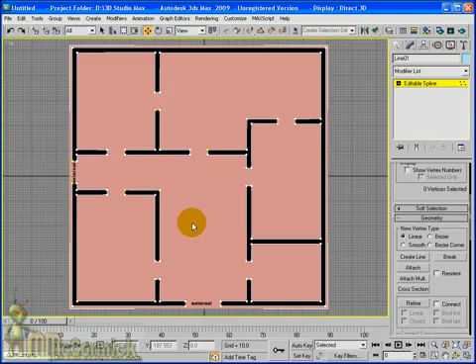Right, I've now aligned all of the vertex points to the walls as much as I'm going to for this tutorial. So you can see from the white points, if I zoom in again, they're all roughly in line with the walls. It's exactly what we want. So if I come right out and show you.

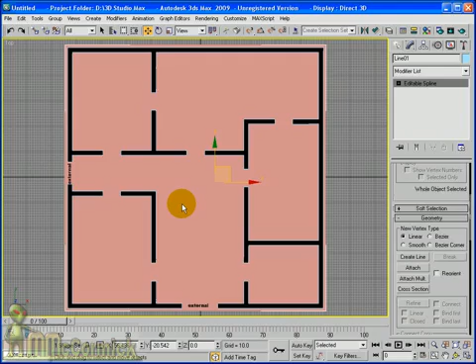Now what we're going to do is take this layout and extrude it up in height. So I'm going to unselect the editable spline. It's a good idea to have this on the perspective viewpoint, so views, perspective, and zoom out a bit, because then you get a good idea about how high the wall is going to be.

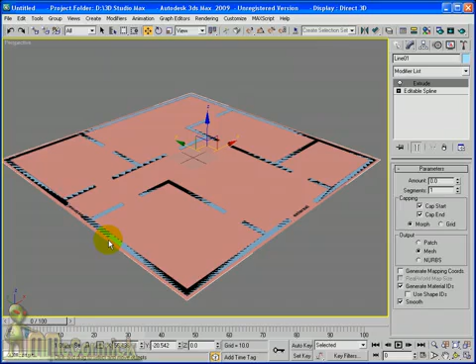So in the modify list, if we select extrude, there we go, you can see that our lines for the layouts have now become polygons, and just by increasing the amount we can decide how high we want these walls to be. Now I'm going to set it about 160 roughly. You can set yours exactly how high you need it.

I'm going to turn on the edged faces. The reason I turn on the edged faces is because I've got an extra step to add some polygons to make the tops of the door frames. And if I increase the segments, you can see we now have a white line down the middle of the walls.

Now I'm going to take these, raise them up nearer the top of the door frames, and that will allow me to join across the top of the door frames to make these bits where the doors are going to go.

So I'm going to add an edit poly modifier and change the viewport to front, zoom out a bit, and we're going to take all of these vertices in the middle and move them all straight up near the top. That's the perspective view, and we can see what we've done there.

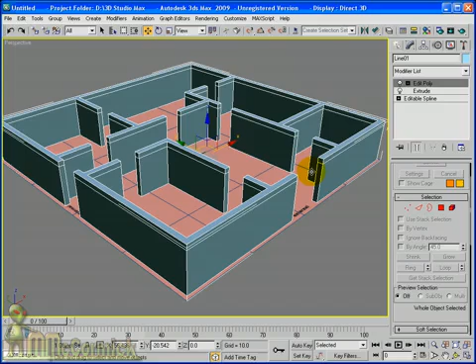So you can see now we have these points that we can use to join across the tops of the doors. So by selecting the polygon, if I zoom in and select that polygon there and that polygon there, you can see I now have both of them selected. And what we're going to do is join this polygon here to that polygon there.

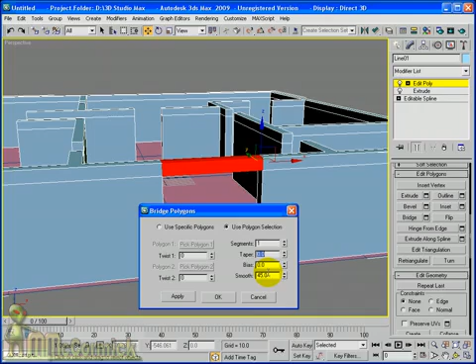We'll use Max's bridge tool. So if I click on the bridge settings, you can see it's automatically created it using the default settings, which is use polygon selection, one segment, no taper, no bias, and smooth 45 degrees. All of that's done, so OK that, deselect it.

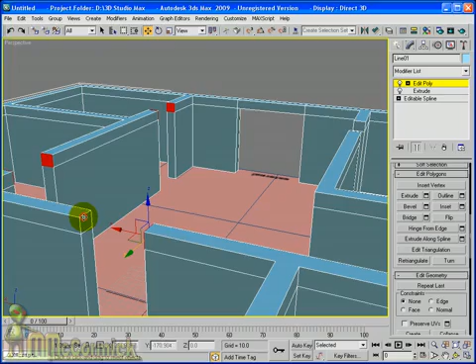There we now have a nice top of a door. You can do multiple door tops at once - I'll show you now. I'm just going to hold down Control, clicking on all of the door tops. If you miss any, it doesn't matter, you can just come back and select them later.

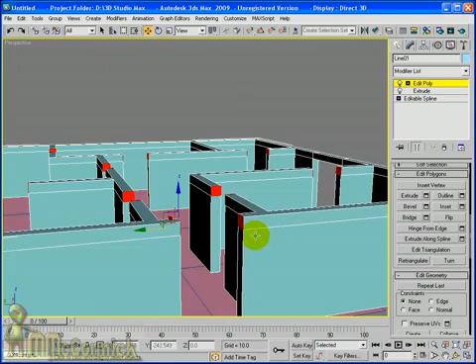Now I think that's pretty much the last one there. And click on the bridge button, and there you go - we now have tops for all our doors. So one quick scout around, make sure I've not missed any. Nope, lovely.

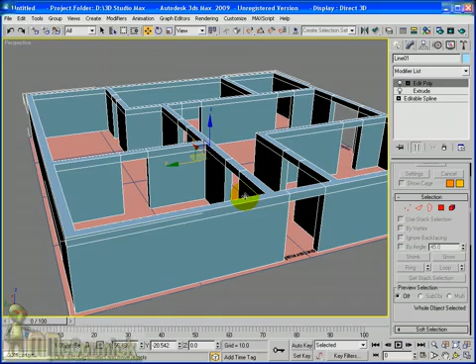Right, so deselect polygon. You can see now that we're almost there. The thing that's missing, unless it's underground, is windows. So if you're going to want windows in your scene, you're going to need to do it. There's a number of ways you can do it. I'm going to do it quickly, using the Boolean.

The problem with using the Boolean is it can create long polygons, and especially for games, anything like that, you might find this can be an issue. In that case you'd probably want to increase the amount of vertices you have in a line along long walls such as this one here. But for this quick tutorial we won't worry about long polygons for now.

We'll just have a go at popping the windows in. In the create panel, under geometry, we're going to create a box. I want to build it on this wall, so I'm going to use the auto grid and build it directly on this wall. I'm going to have two windows on this wall, and I'll click and start there. You can see the auto grid in action, making the box directly on the wall.

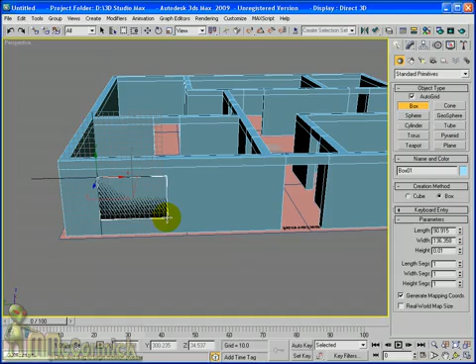I'm going to have that sticking out quite a large amount, and I'm going to move this box to there. Now I'm going to make all of the boxes where I want the windows to be, so I'll create another one by cloning, and this will be a copy. To clone, I held down the shift key and just moved the box.

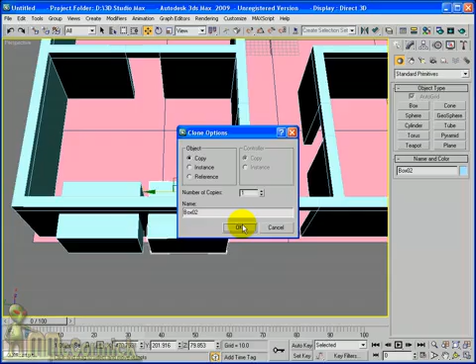Now, so I have two boxes that I'm going to use as windows. I just want to move this box slightly over a little bit. Now, I'm going to create a boolean.

So if I select my wall object, and where's standard primitives, compound objects, we'll go for pro boolean. The pro boolean will take the walls, and it will use these boxes to cut holes in the actual walls ready for the windows. We'll use this by clicking on the start picking button and just clicking on the boxes. There you go, 2 windows all ready.

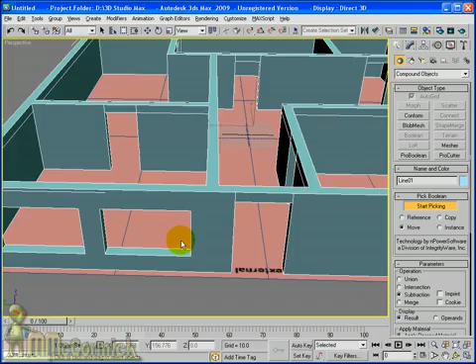Click on the start picking option again, because I don't want to continue picking until I've made some more boxes. So back to standard primitives, let's create some long and thin windows here.

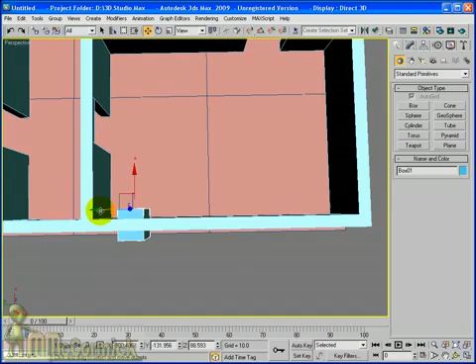Just making sure it's intersecting right through the wall. I think we'll have a row of windows there. That one's come out a little bit close, so control click on all of them and just drag it over so they're more in the middle of the wall. There we go.

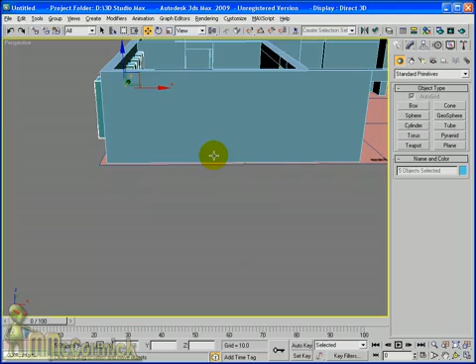What I'll do is I'll take one of these ones, I'll clone that one, rotate it around, I'll use the angle snap and rotate it 90 degrees. There we go. Let's pop this through this wall here and we'll just have 3 on this wall.

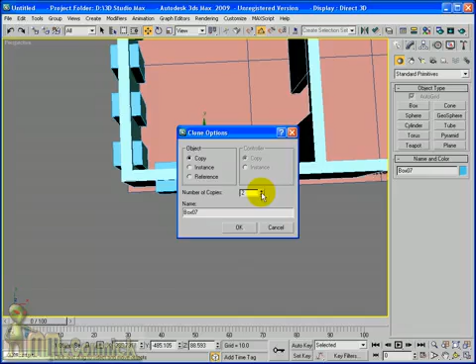Quite a lot of windows in this one. What we'll do is we'll take all of these ones and we'll clone them along to this wall as well.

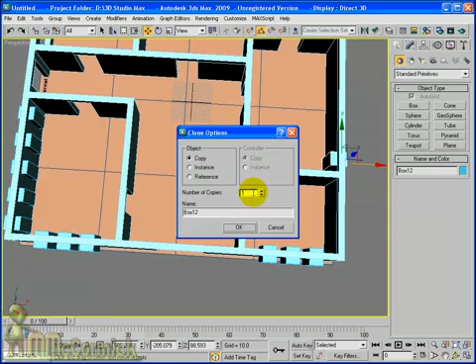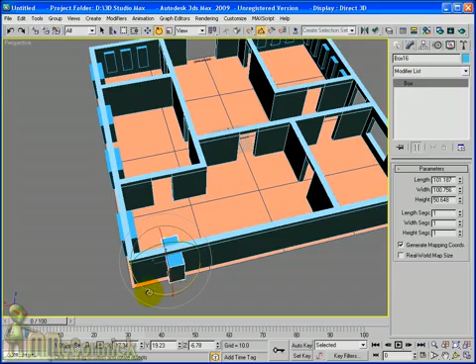So we're looking for a 90 degree rotation there. Almost done. Last one. All done. So we now have quite a few windows ready for this.

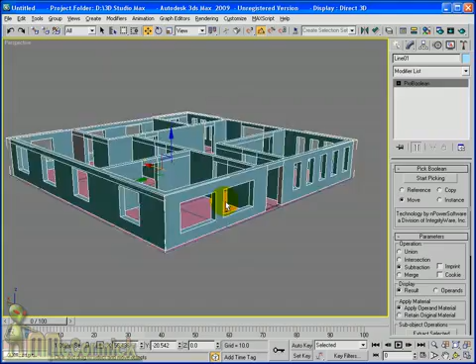So selecting our walls object, start picking, selecting each of the boxes, and we're done. We now have nice areas ready for our windows to be put in. That didn't take too long. So that's how you'd actually extrude your floor plan.